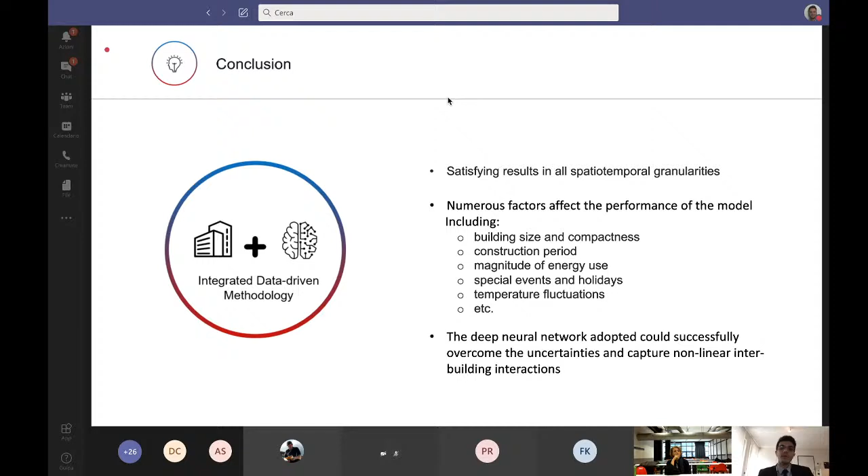We found that many factors affect the performance of the model, including building size, magnitude of the energy use, and special events. We also found that the deep neural network adopted could successfully overcome the uncertainties and capture the nonlinear interactions among the buildings.

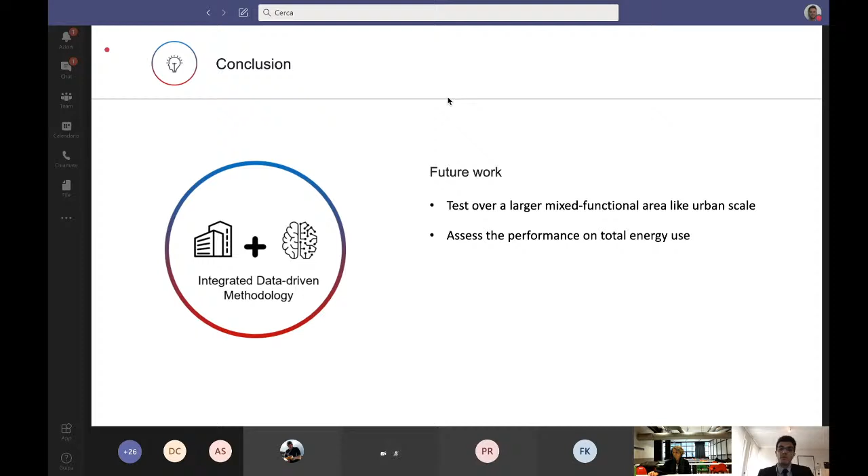Future work can be done on testing over a larger mixed functional area like an urban scale, assessing the performance on other energy carriers like gas and chilled water, and employing sequence-to-sequence deep learning algorithms like long short-term memory, since we are dealing with time series data. Adding more input features in both steps may improve the model performance. Thank you for your attention.

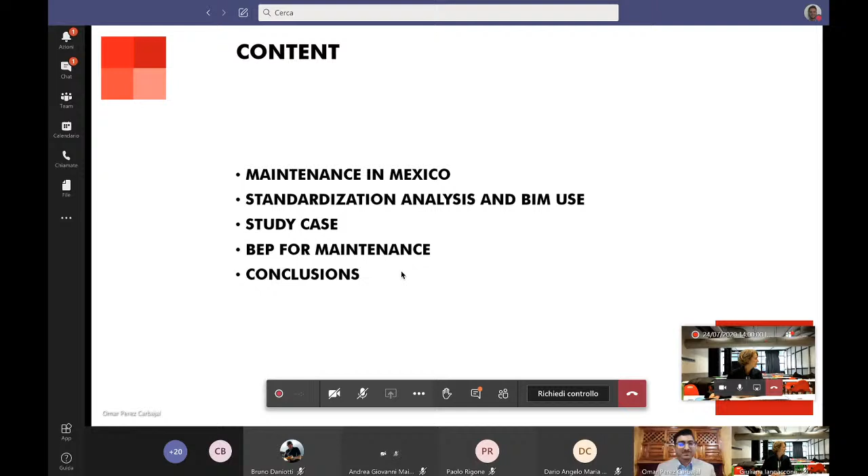In order to understand the challenges that constructions will face in the maintenance process, it is important to understand how construction in Mexico is held.

Then, all these constructive materials are highly affected by the climate influence.

These factors, in addition to a poor maintenance culture in Mexico, result in a very quick decay process and maintenance processes that are very costly, because currently maintenance activities are done when the constructive materials are totally failing.

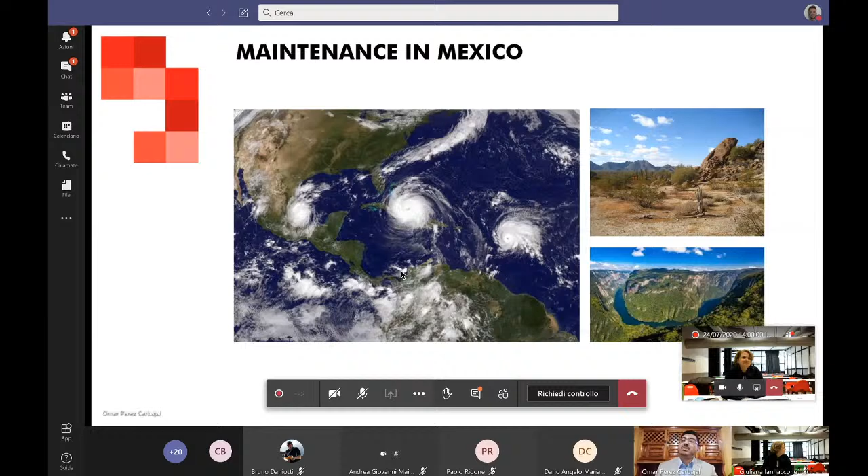How can we create a structured plan to support these maintenance activities? In order to solve this, it was decided to study the different standardizations available to define an information management strategy and the different requirements to be followed.

It was decided to divide the standardization analysis into three different levels. Firstly, studying the ISO normativity related to asset management, to the BIM execution plans supported by building information models, and the life cycle analysis and prediction.

In the second level, we studied the national normativity of a success case like the United Kingdom, where these BIM execution plans are a reality and a legal requirement.

And thirdly, we will discuss the national normativity most recently released in 2017 in Mexico, related to the BIM execution plans and its requirements.

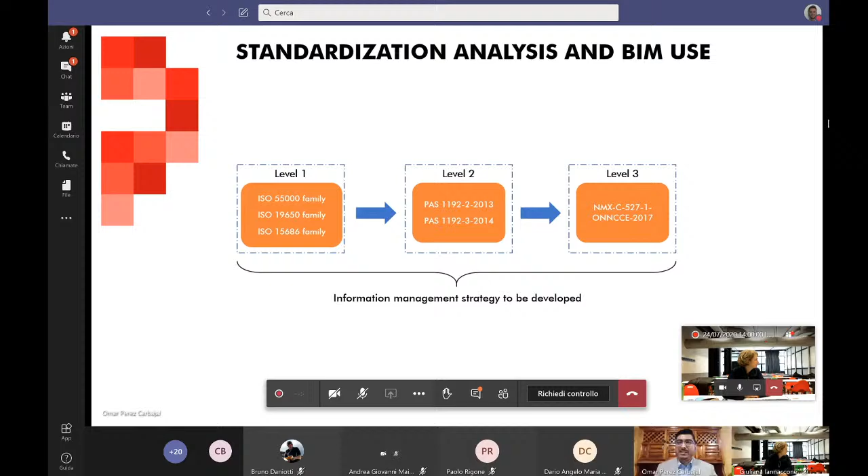One of the most important things during these processes are the trigger events. These events are where the information is generated. In the operative phase we are interested in, the trigger events will be related to the maintenance process that this building will have during its entire life cycle.

So in every maintenance process, information will be generated and recorded in the Asset Information Model, or AIM.

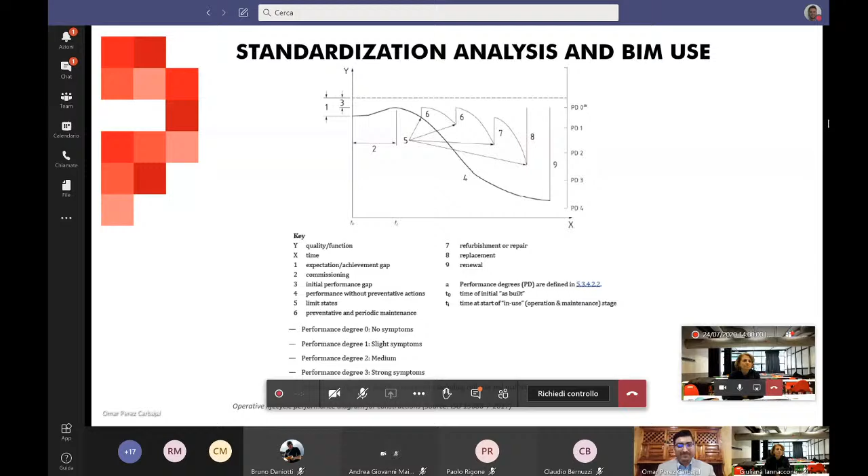Then, how can a building information model improve this structured maintenance process? Here we have some benefits.

First of all, it enhances collaborative working between specialties. This means that all the interested parties and specialties involved in the project can have the information at the right time and in an organized way, so everyone can work independently while sharing information.

Secondly, it allows efficient information processing, as the building information model, inside its structure, allows the user to input all the information in volumetric containers that we see in the model. So all the processes can be input in an easy way.

Thirdly, it links all the information stages in one source. This is an important requirement for the asset information model, as according to the standardization available, to comply with this maintenance process, it is really needed that we have a centralized source of information related to this model.

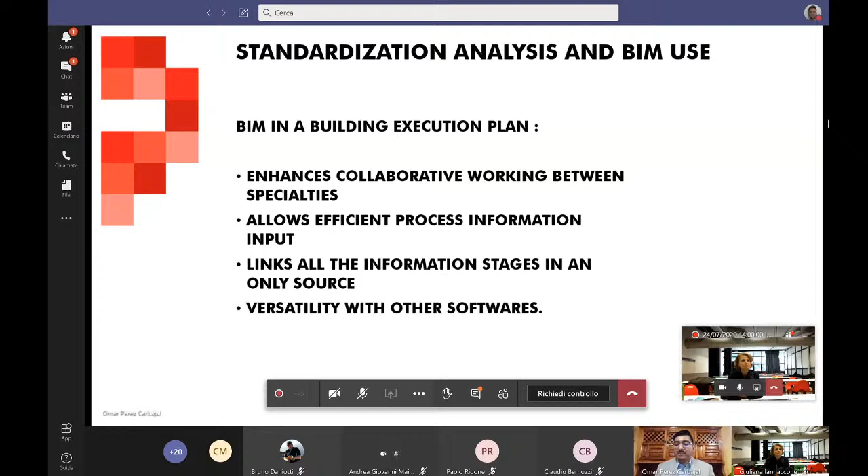And finally, coming back to collaborative working, the versatility with other software. This means that the building information model can be shared with different software according to the different specialties, in the form of an IFC.

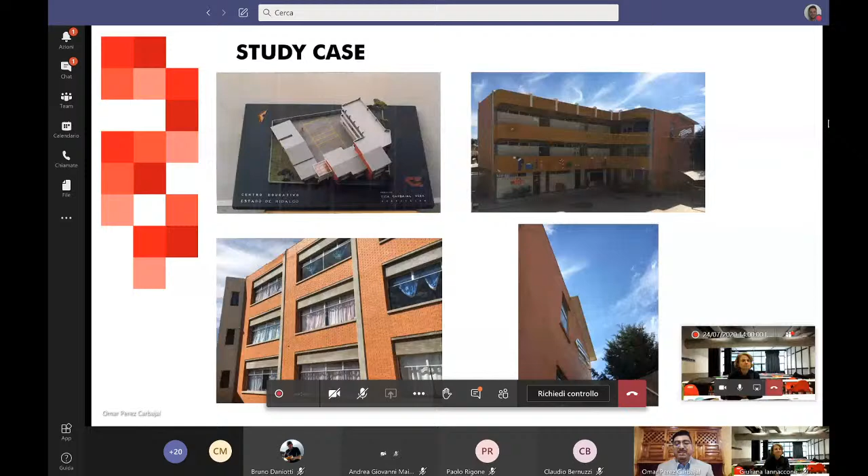Then we will pass directly to the study case. It is a medium-sized elementary school located in the central part of the country, in a municipality called Santiago Tulantepec. This small school has an approximate surface of 750 square meters, divided into 3 different levels.

Thanks to the information provided by the building owner and the architect in charge, this building information model was created. In the first step, it was decided to understand how the different sectors of the school are divided, in the form of plans, as we can see in the images.

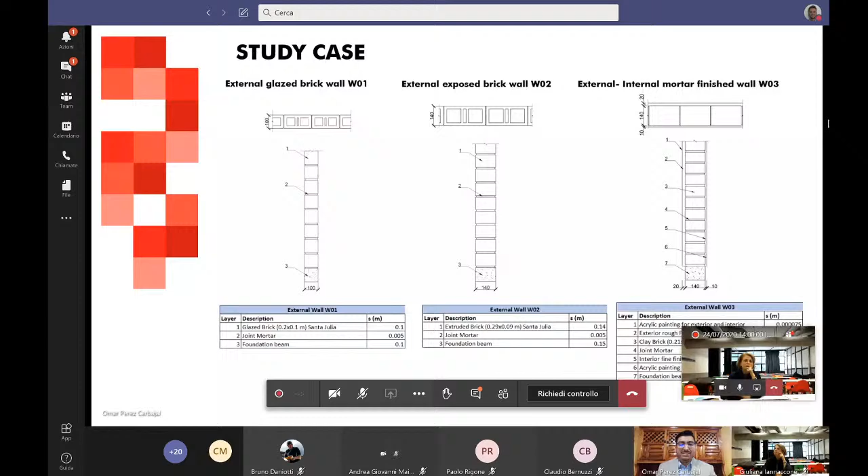There were studied the different stratigraphies or constructive solutions that the school has. Here we can see these vertical closures or walls, 5 in total, and 3 different horizontal closures or roofs. Also, inside the model, it is very easy to identify these different stratigraphies inside the plans.

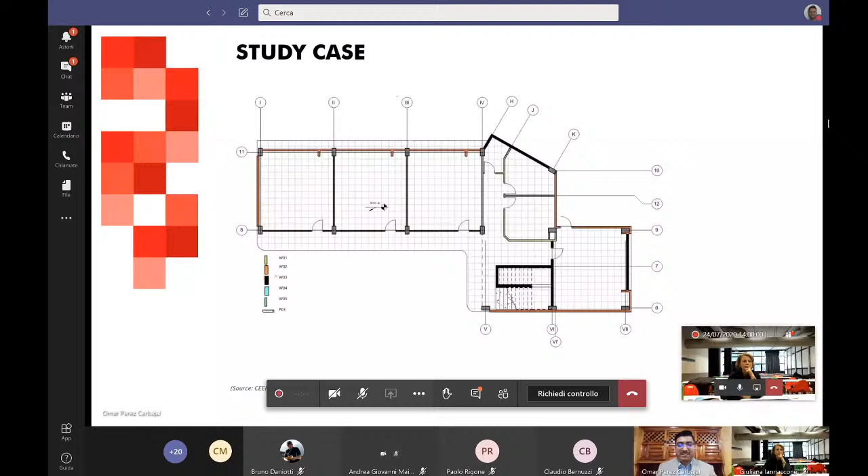So it is very easy to understand and easy to quantify inside the Revit model, as we can see here in the plans.

Then, in the very first part of the year 2020, a preliminary inspection was done in order to know the current state of the construction. We can say that after 25 years of operative life, the school has not suffered so much damage at this moment. But it was important to show some important failures that need immediate attention.

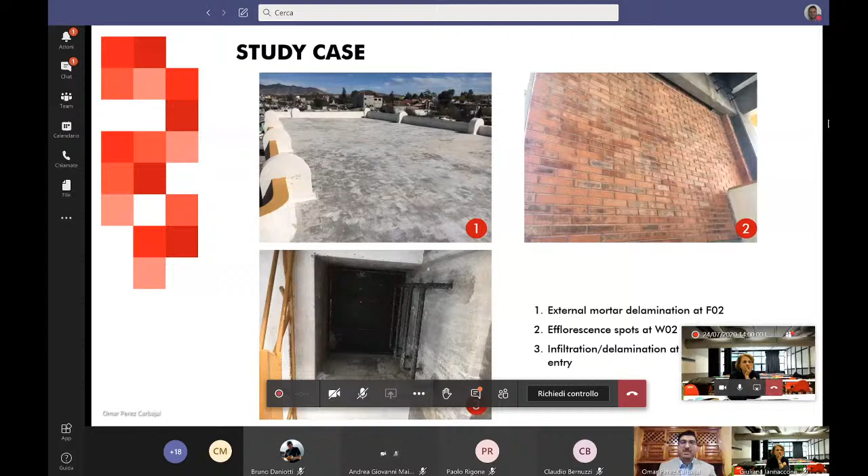Well, once we know the local study case and the factors that will affect this, now it's important to know how the building execution plan is created.

According to the standardization available, we have 4 different information requirements that need to be complied with in order to build this building execution plan. As we can see, these are organizational, asset, project, and exchange information requirements.

This will derive into the different information models that we need. In this case, the AIM or the PIM.

Coming back to the national normativity, here we can see the main requirements according to the law, and it can be seen that from point 1 to 6, it matches approximately the information requirements we have seen in the previous graphics. So, in order to identify these requirements and compile them in a form of agreement, a unified format was generated where all this information can be input and discussed, as we can see in this slide. First, we have a very brief introduction, the project information, and the different requirements for all the interested parties.

Then, the key personnel required to follow this execution plan and the agreement signatures, so everyone can follow and refer to this document for future processes.

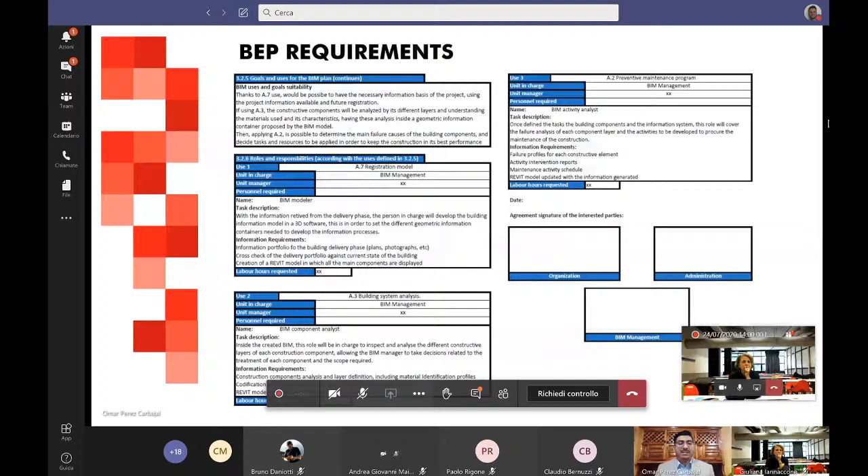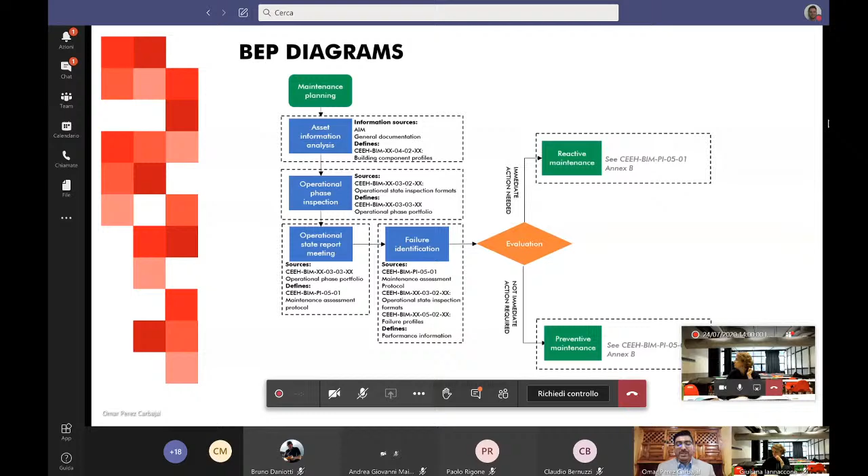Following the diagrams, we can see the different steps we follow, always complying with the document presented before, the BIM uses and goals. If it complies, the activities could be followed, executed, and approved, then passed and archived inside the AIM. Otherwise, the process needs to be repeated until it complies with the information requirements explained before.

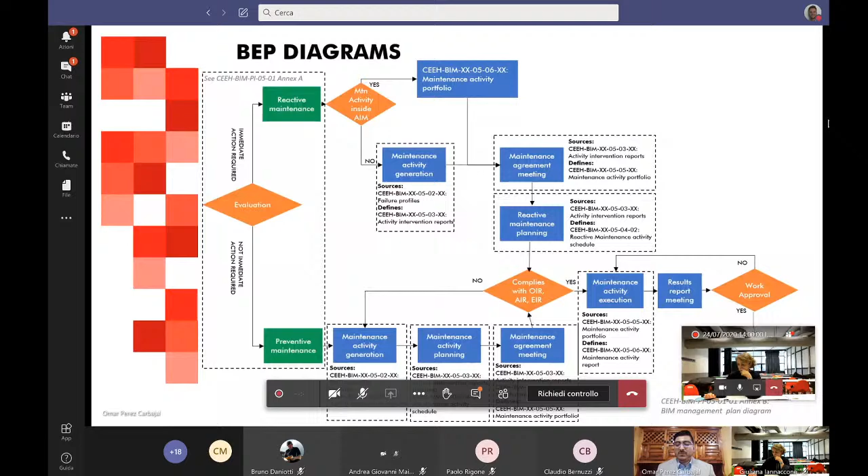Now we will explain, in a very brief way, the different documentation generated in a simple case. As can be seen in the images, we are talking about the component F02, the top group we have seen with the delamination. It explains the different constructive materials composing it, and more specifically, all the performance factors it has, thanks to the technical brochures and the information provided by the provider.

Once we identify all the elements, we can make an inspection format where all the failures can be recorded and explained in a simple way. Then, supported by this inspection process, we can speak about a failure profile with all the details about the profile and an evaluation of it.

As can be seen in the image, the performance factor here is decided to be 4, unacceptable, as the delamination of this component can compromise in a very severe way the weather tightness of the roof. Once we evaluate it, it can be presented as a suggested sequence of steps to fix this, and here we are talking about the layer replacement.

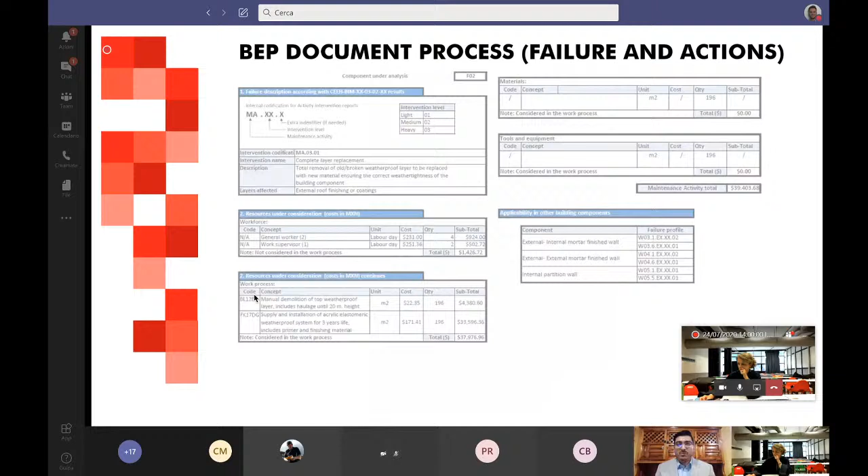Once we agree with that, we can go to an operative activity plan, as can be seen in this image. Here we can see all the resources explained in terms of workforce and tools, and the total cost that this activity will have.

Finally, we can reflect all these activities in a form of a schedule, where we can have the planned and non-planned activities. As explained before, the complete layer rehabilitation, in this case, is considered a reactive maintenance activity that must be followed with operational maintenance and results report meetings.

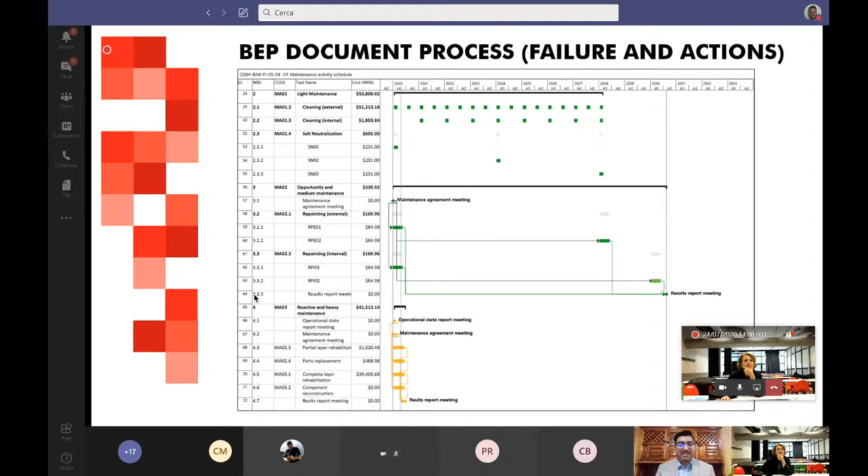Then we will explain, in a very brief way, how we can input all these information parameters inside the Revit model.

Once we are inside the Revit model, it is important to understand how Revit interprets the information we are putting in. As commented before, all the building components have 6 different constructive layers, and these constructive layers are interpreted in Revit as Revit parts, and every one of these Revit parts will have its own parameters, totally individual for each one of them.

As we can see, completing all these parameters will be very time-consuming, and mistakes can happen very easily. So it is important to have a very safe and secure way to control this. How can we input these parameters without mistakes?

For that, it is decided to rely on a tool inside the Revit model called Dynamo, which allows us to make very simple programming in order to identify these systems and apply the information parameters that we want.

Once we are in Dynamo, here we have the searching criteria in the first steps. As commented before, we are looking for parts, and at the bottom we are seeing the searching criteria we are looking for. In this case, we are looking for the building component layer, specifically W01.1.

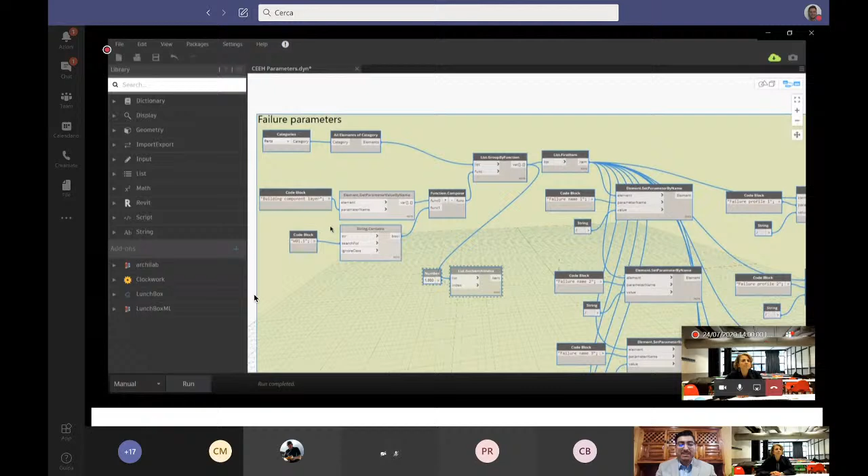Once we apply this searching criteria inside Dynamo, we can see that we find more than 200 elements. But once we search with the W01.1 criteria, we have only 44. So all these components are very easy to identify, and thanks to this very simple script, all the parameters that we need can be added.

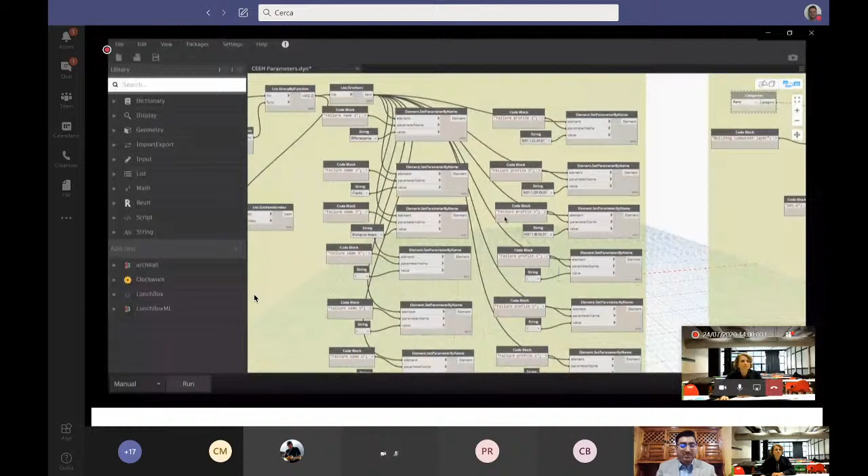Once we are inputting all the parameters and we verify that the information is correct, it is very easy to input all these parameters in just one step. That is to run the script and wait until it's done.

Once back in the model, we can randomly check the different components, and finally we see that all the information input that we have done in Dynamo is done correctly. So all the information matches and is done in a very quick way, comparing with the traditional process that is input by hand.

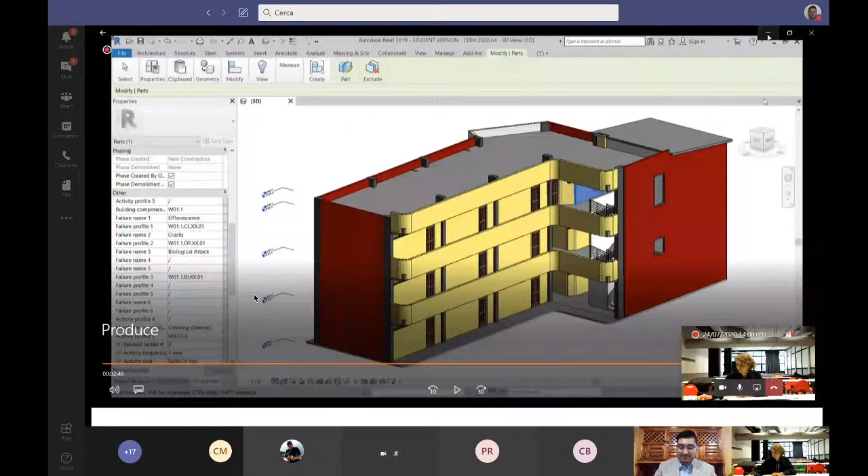Finally, we are talking about the conclusion. We can say that thanks to these BIM execution plans, there is a positive collaboration between parties, and this is a crucial step in the current building industry, because even now we need more collaboration between all the interested parties and all the specialties. So if we comply with this, the process could be much easier and much quicker.

As a drawback, it is needed an initial higher demand of time and organization, as it is required to deal with all the specialties in order to create a correct BIM execution plan.

And also, we are talking about a technological transition, because in Mexico right now the BIM technology is available, but it's not so spread. We still rely on a 2D drawing process. But if we apply these BIM execution plans and we believe in the BIM execution process, we can have benefits in the future, as happened in countries like the United States or in the European Union.

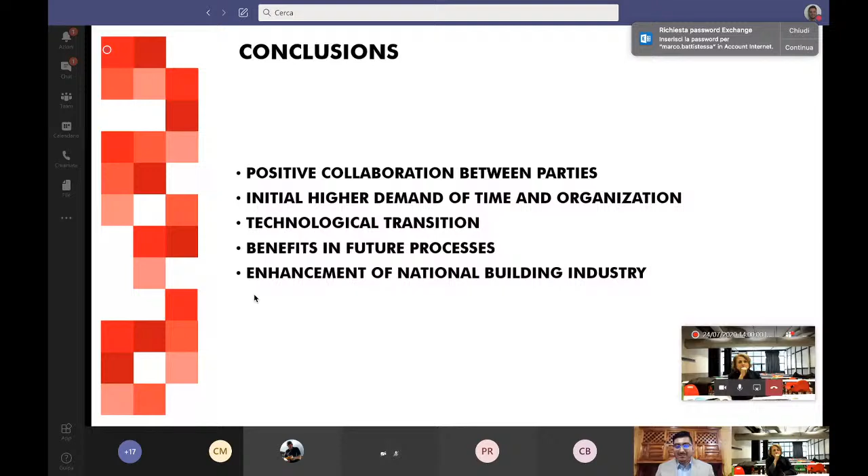And once we believe in these BIM execution plans and the BIM technology, we will improve and enhance the national building industry that is very needed in Mexico, as we have very good construction, but the standardization is still poor. So with a little bit of effort, this can become a reality.

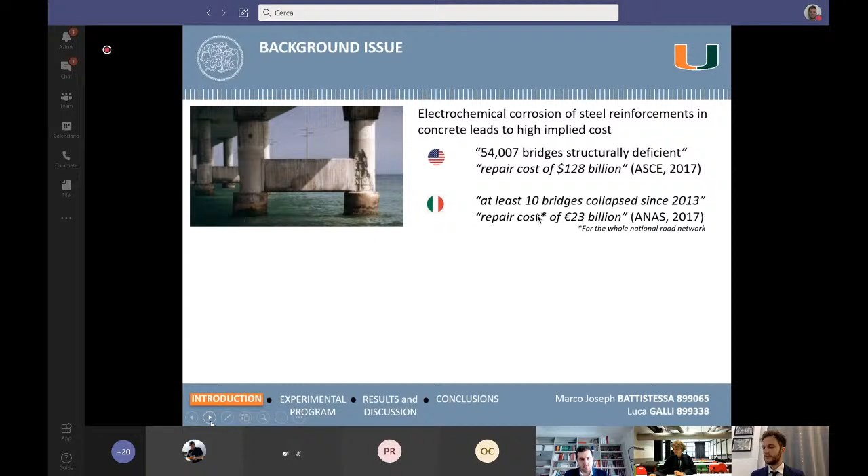To overcome this problem, alternative rebars were introduced in the last decade, made out of non-corrosive materials such as fiber-reinforced polymers, especially glass fiber-reinforced polymers, due to their competitive cost and good mechanical properties.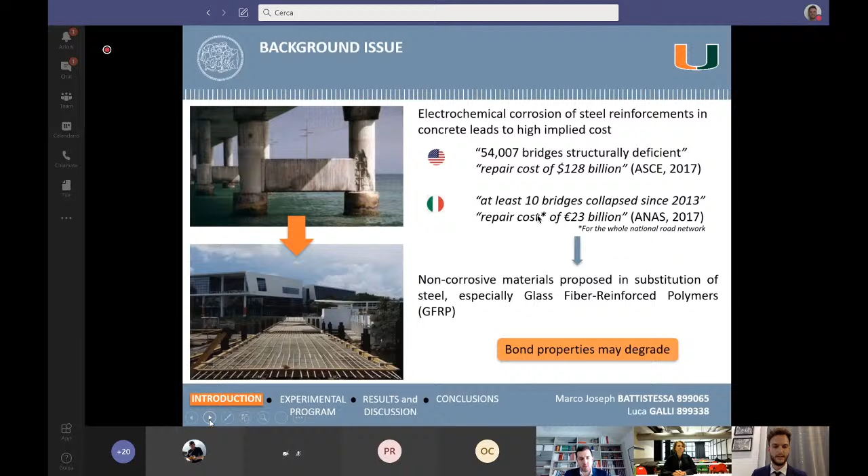However, GFRP rebars might show other issues related to their durability in concrete, because external agents like moisture content, alkalinity, and high temperature may degrade the bond of this kind of rebar. For these reasons, in-depth studies are becoming necessary to better evaluate these effects.

Nowadays, different laboratory tests are used to assess the bond strength between GFRPs and concrete. Usually specimens under accelerated exposure conditions are tested to evaluate and simulate bond and loss of performance over the long term. Among these test methods, the direct pull-out test is widely used because it's simple and requires a small specimen. Other tests like the beam test better simulate the real stress state condition of a reinforced concrete structure.

However, these tests do not apply to specimens taken from existing structures. On the other hand, as an on-field test, scanning electron microscopy is the only way to observe the aging effect of GFRP rebars on specimens that come from a real structure. But of course, this test cannot measure bond strength.

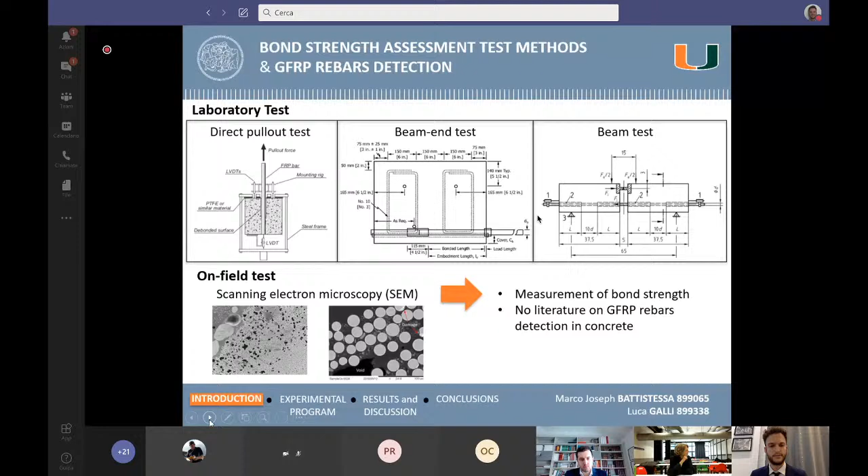So regarding on-field tests, there is a need for a way to measure the bond strength, and also there is no literature on how to detect this kind of reinforcement inside the concrete.

For this reason, this master thesis work aims to define a possible test able to evaluate changes of the adhesion between GFRPs and concrete, defined so that it may also be performed on specimens taken from existing structures. Secondly, we want to provide guidelines for the definition of a non-destructive test for the detection of this kind of reinforcement.

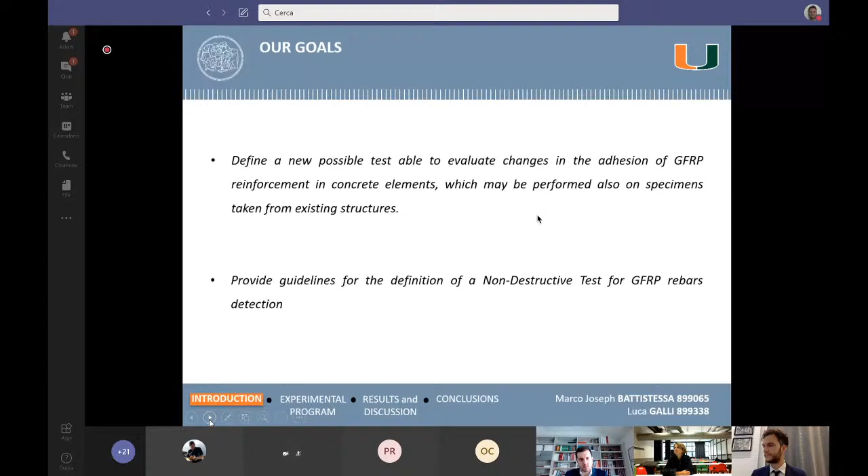During our experimental program, we chose the materials according to a previous thesis work where the new test had been introduced, in order to make comparison with them. All specimens were made out of the same kind of concrete, whose binder is composed of Portland cement and slag, and the same kind of commercially available reinforcement, covered by a sand coating and a helical wrap on the surface. In this way, we wanted to limit as much as possible the variables to be studied.

First we performed several compressive strength tests in order to have a mechanical characterization of the concrete. We carried out tests after 7, 14, and 28 days of curing in a moisture room at 23 degrees and a relative humidity of 95%.

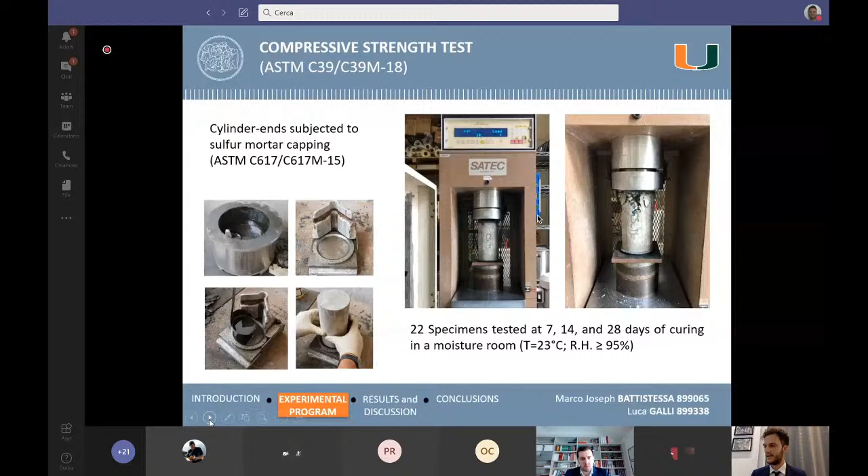Let's talk about the punch test, which is the methodology proposed in the previous thesis work to evaluate the effect of different environments on the adhesion between the GFRP and the concrete. This test is originally available in the American standard, but is used to test structural chemical anchors. Starting on this basis, it has been modified, trying to define a proper setup for the new purpose.

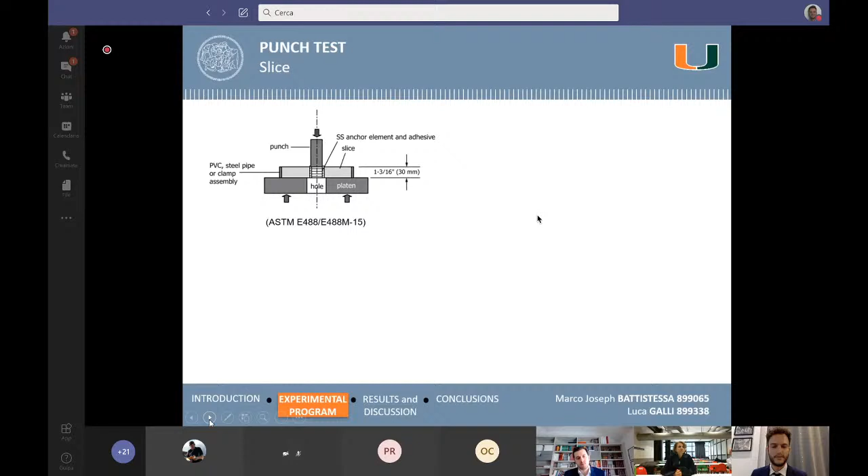The specimens, as you can see in the picture, are cylindrical slices, 3 cm thick and 15 cm in diameter. Compared to the tests previously seen, the punch test provides several advantages because, as you can see in the figure, the specimens are much smaller than those of the pull-out test.

In addition, thanks to its test methodology, it's the only method that can be applied to specimens taken from existing structures.

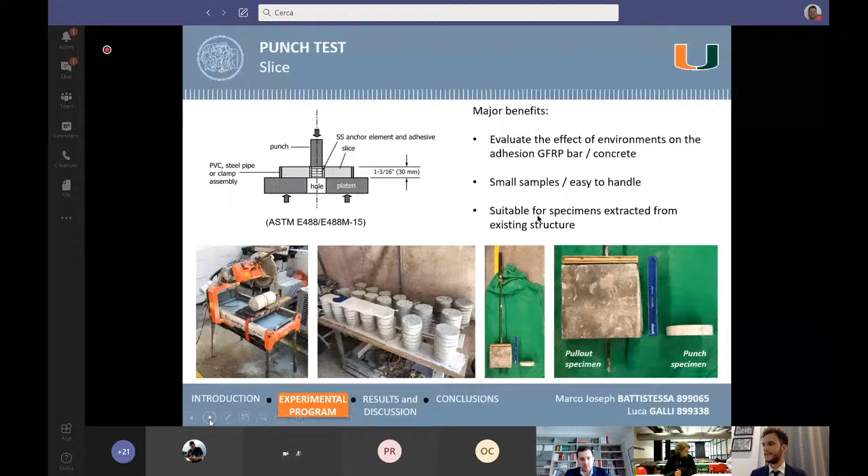However, specimens of such geometries might be affected by splitting of the concrete while the load is being applied. To avoid that, we studied the effect of confinement forces by applying a T-bolt steel clamp along the circumference of the slices in a range from 0 to 14 Nm, and also the specimen support configurations, where differences were about the interlayer between the specimen and the steel plate.

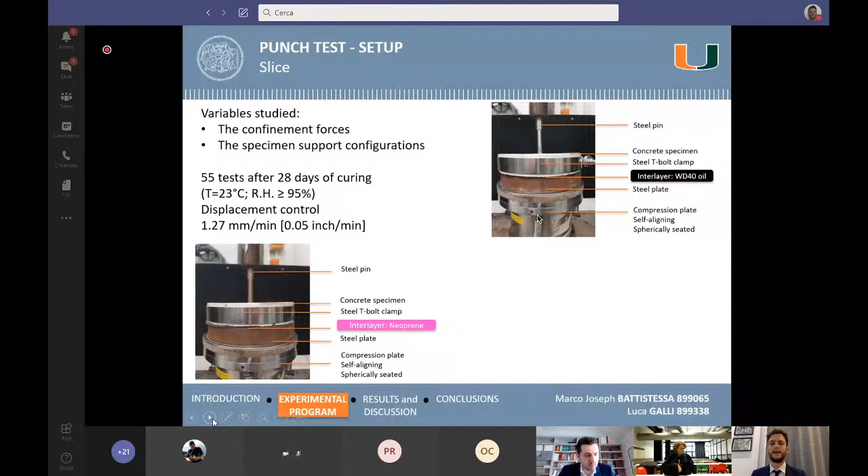In the first configuration, we used an interlayer of WD-40 oil to reduce the friction coefficient between the concrete and the steel plate. Then we tried a neoprene mat, 1.5 mm thick, and also a third configuration where we applied a sulfur mortar capping on the bottom surface of the concrete. In these last two configurations, there is a hole in the middle of the interlayer to allow the rebar displacement.

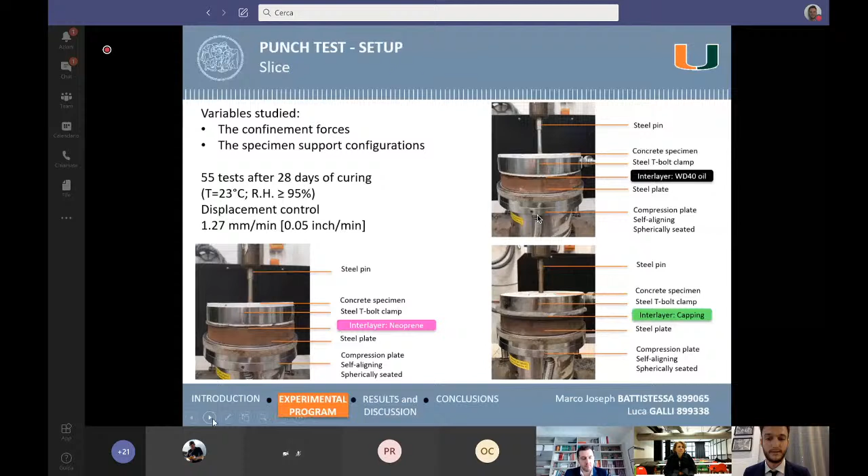Well, now let's have a look at what we got in terms of results. Here we can observe the results obtained by the compressive strength test performed at 7, 14 and 28 days of curing, and also the estimated evolution fitted according to Eurocode 2.

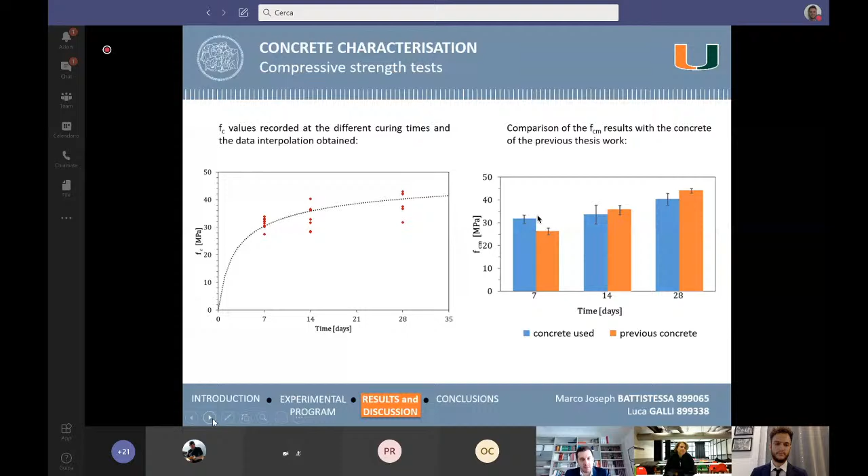This graph shows the mean compressive strength of each curing period, compared to the one obtained in the previous thesis work. You can see that after a quicker development of mechanical properties in the concrete we used, we got very similar results at 14 and in particular 28 days of curing, with values around 40 megapascal. From this point of view, it appears evident that the two concretes are comparable.

This bond stress versus slip diagram points out the three typical results observed during all the punch tests performed. No matter the support configuration used, similar trends have been obtained depending on the occurrence or not of the splitting phenomenon in the concrete slices.

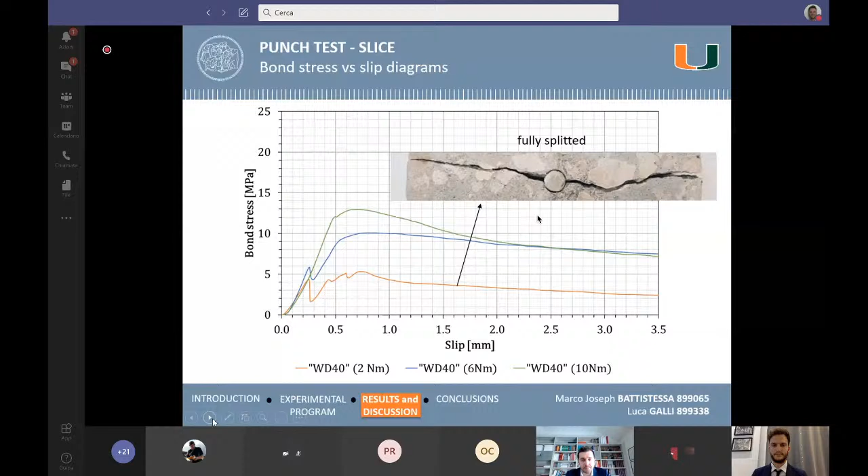The orange curve is an example of the trend obtained in all the slices recorded as fully splitted, characterized by a fully developed crack. The blue line shows specimens recorded as partially splitted, where a slight crack on the bottom surface of the slices was recorded. The green line explains the typical trend in which no evidence of concrete splitting was recorded.

In the first two cases, we can see an initial discontinuity arising in bond stress values around 4 or 5 megapascal. In this range, the average tensile strength of the concrete, estimated equal to 3.5 megapascal, might be reached. So the presence of this discontinuity seems to be related to the concrete cracking.

In the samples partially splitted, after the discontinuity there is a further increment in the bond stress. That's why in such cases the crack propagates until it meets the opposition of the confinement action provided by the steel clamp. In fact, increasing the tightening torque applied, the discontinuity becomes shorter and the maximum bond strength becomes higher.

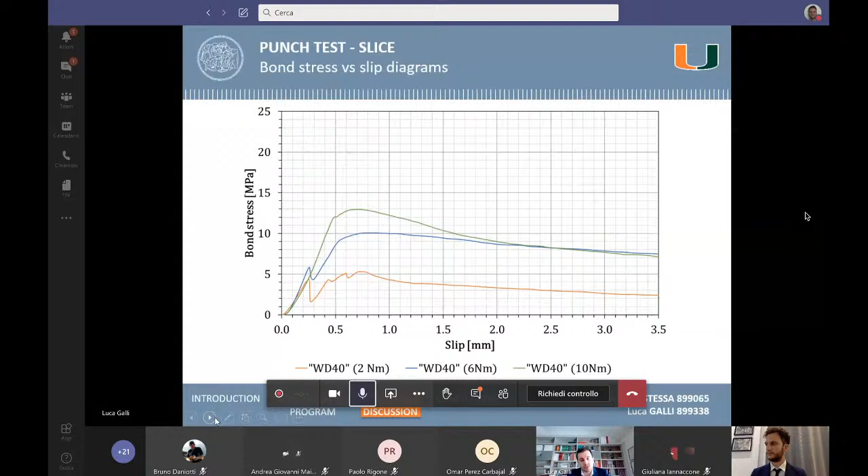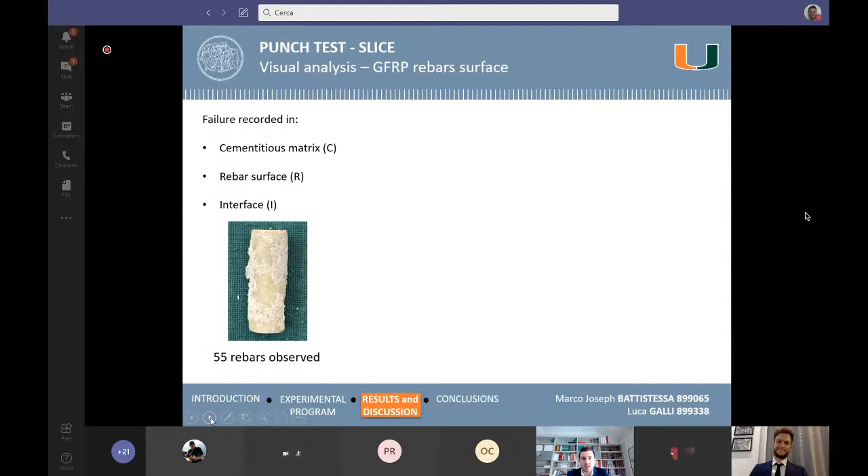At the end of the punch test, a visual analysis of the GFRP rebar surface was carried out to evaluate the failure mode. We classified the failure mode as failure at the cementitious matrix, failure at the rebar surface, and failure on the interface between concrete and reinforcement. In all the rebars observed, we have seen the three types of failure in different percentages.

Looking at this graph, we can see the maximum bond strength values obtained in all the punch tests performed, according to the different support configurations. The capping was the support configuration in which the highest number of values were recorded as not splitted.

It was experimentally determined that a tightening torque at least equal to 4 Nm should be applied to the steel clamp to guarantee this condition. A tightening torque of 10 Nm is necessary in case of WD-40, while 14 Nm has been found necessary in the neoprene configuration.

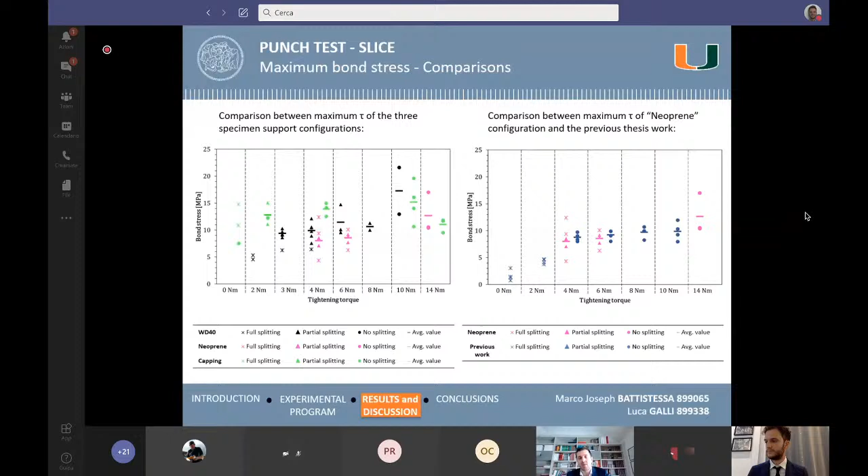It should be noticed that the specimens from the previous work, here reported as not splitted, have shown the same discontinuity in their graph that we previously analyzed. These results confirm the indication of the procedure to be used to perform the punch test.

The data that we have obtained from the concrete slices are fundamental to better evaluate also our setup for the sample extracted from real structure. For that purpose, the punch test was used also on cores extracted from reinforced concrete beams that we have cast, as shown in the picture, and subsequently on cores extracted from a real structure.

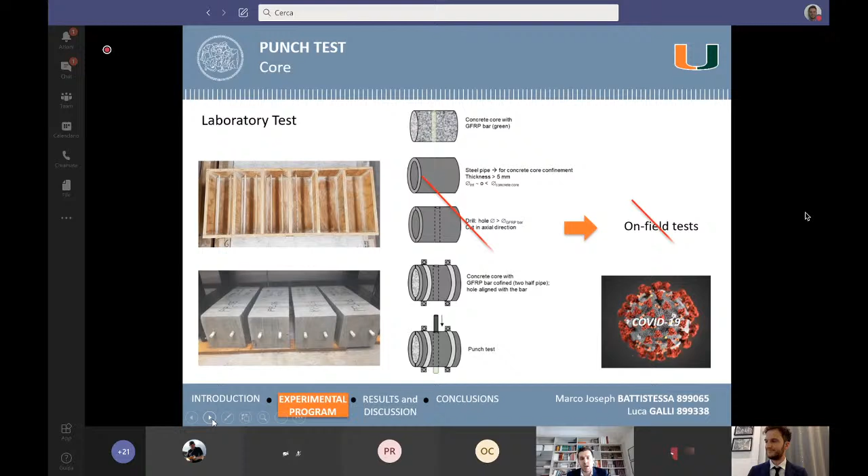Our setup was already studied, and a GFRP reinforced concrete bridge was already identified. It was planned to extract several cores from different parts of the structure to evaluate the effects of the marine environment on the adhesion between GFRP and concrete. However, while we were developing this part, the unpredictable spread of COVID-19 stopped all research activities at the University of Miami, so it was not possible to complete this part of the tests.

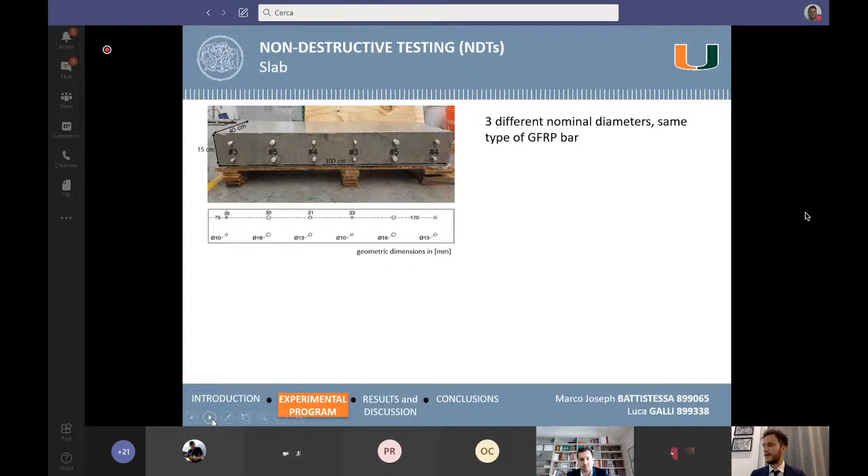In the second part of our experimental program, a reinforced concrete slab was produced to run non-destructive tests on it, and several rebars were embedded inside in order to test the instrument sensitivity. Among the available non-destructive tests, ground-penetrating radar and ultrasonic tests were selected because they seem the most promising, since they have no material dependence.

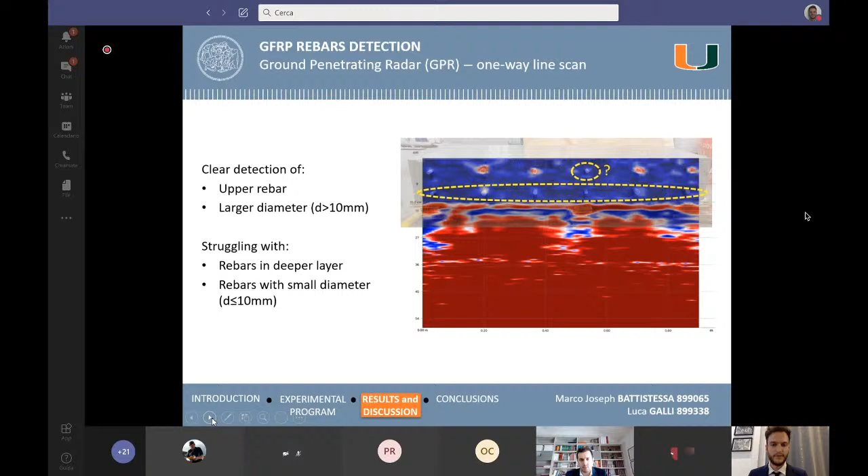Here we can see better results from the one-way line scan. As you can see, the rebars in the upper layer have been more clearly detected, which becomes clear when overlapping the picture of the slab, except for the smallest one, rebar number 3, whose nominal diameter is 10 millimeters, which was not detected. The same applies to the rebars in the bottom layer, except for rebar number 5, whose nominal diameter is 16 millimeters.

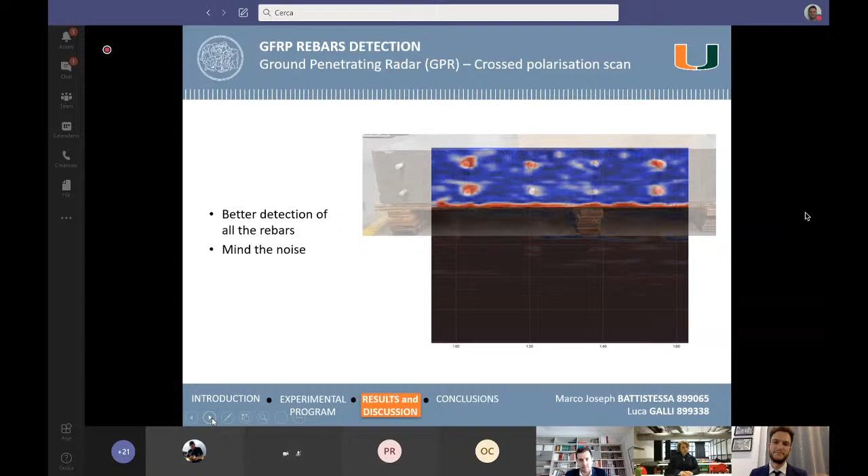We then performed a cross-polarization scan. Again, overlapping the picture of the slab, we can see that generally all the rebars have been clearly detected, so it was possible to obtain higher resolution results. But higher resolution also means more anomalies in the medium might be detected, so when balancing the settings, one must be careful about the noise.

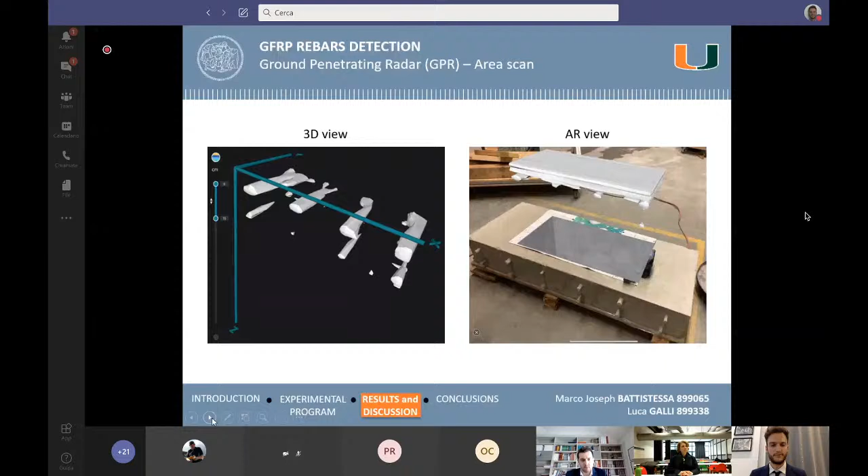We then performed an area scan, which should be performed using the special paper given by the GPR manufacturer. The area scan can be analyzed in augmented reality view and also in 3D view. This visualization gives a broad understanding of the spatial distribution of all the targets inside the concrete. But considering our purpose, we believe more useful information can be acquired from the previous two scans, since you can obtain the target position as well as depth and distances.

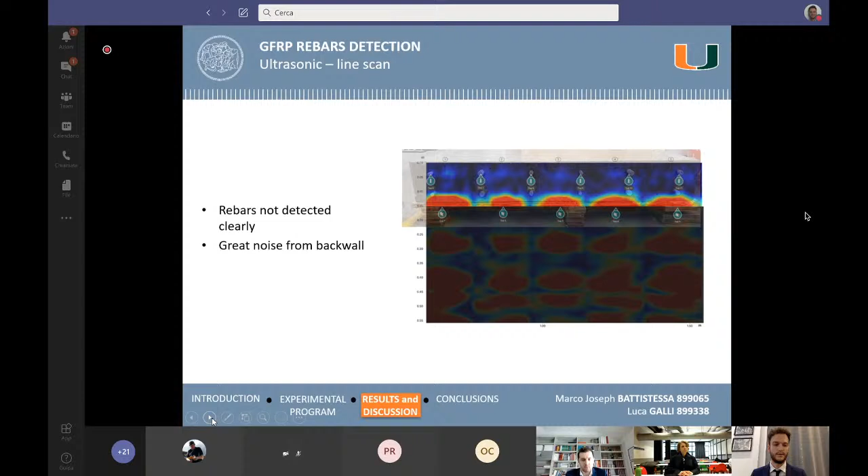At the end of our experimental program, we performed a line scan with the ultrasonic test. Again overlapping the picture of the slab, we generally cannot really tell where the rebars are. The tags shown were manually placed, but there is no clear detection of all the reinforcement, and there is also great noise from the backwall. This preliminary test shows that the ultrasonic test seems to be ineffective for locating this kind of reinforcement. Nevertheless, further tests with different types of concrete and on-field applications are essential to evaluate the real effectiveness of the ultrasonic test.

Okay, from the test carried out on this thesis work, we can draw the following conclusions. We have combined different combinations of confinement forces and specimen support configurations to define a proper setup for the punch test and to avoid concrete splitting of the sample.

A loss of adhesion has been measured in the partially and fully split specimens. We have also observed that the occurrence of concrete cracking depends on the flatness of the specimen and on the confinement force. For capping, which allows perfectly planar surfaces of the slices, a lower tightening torque has been found necessary to avoid concrete splitting, while higher values are needed for WD-40 and neoprene configurations.

Also, capping is a procedure largely used in the compressive strength test, so it might be used for the same purpose in the punch test, since it does not require the time-consuming practice of specimen preparation. In the visual analysis, it has been observed that failure at the rebar surface is higher when the bond stress is higher. But the most predominant failure mode has always been observed at the cementitious matrix level.

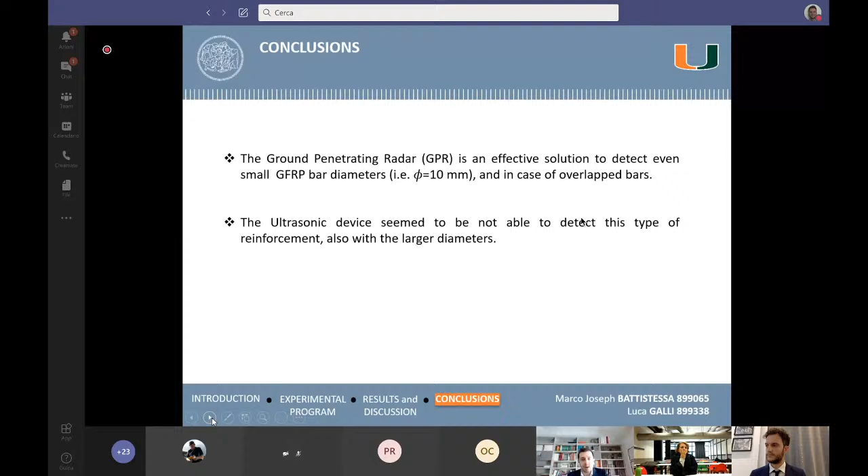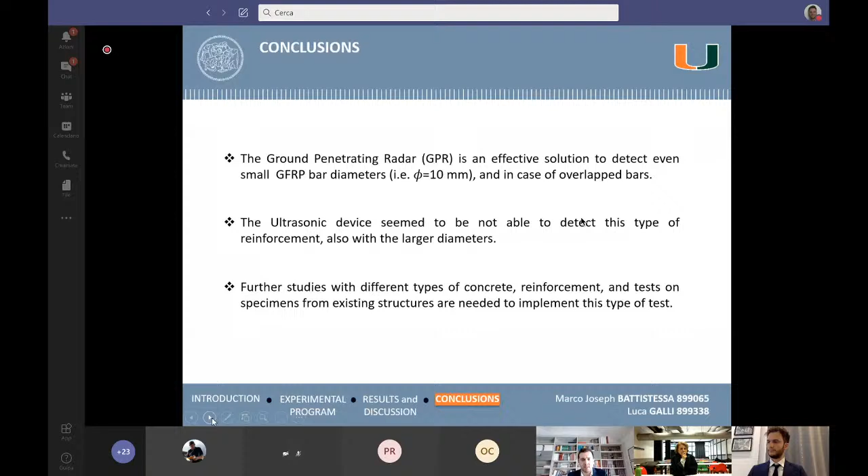The results compared with previous thesis work have confirmed the reliability of the proposed methodology for the punch test. Ground penetrating radar proved to be an effective solution to detect even small GFRP diameters, including in cases of overlapped bars. The ultrasonic device, instead, seemed unable to detect this type of reinforcement, even with larger diameters. Further studies with different types of concrete reinforcement and tests on specimens from existing structures are needed to implement this type of test. Thank you so much for your attention.

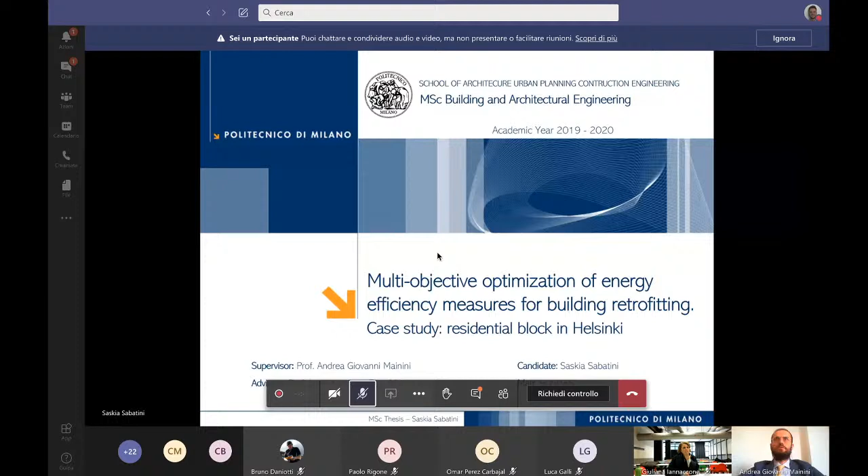The thesis addresses the issue of cost optimality in the choice of optimal solutions in terms of investment and energy saving for the renovation of a case study building located in Helsinki. The study involved the use of IDA ICE software and its multi-objective optimization tool for selecting suitable energy performance improvement measures. In addition, the candidate worked closely with the software development team, and part of the work consisted of undertaking software debugging activities. So good luck for your presentation and have a nice start.

Thank you for the introduction, Professor. So this thesis concerns multi-objective optimization for measures for a case study located in Helsinki. The main objectives are to define efficiency measures to maximize both the cost effectiveness and the energy performance of the building retrofitting, in compliance with national requirements. Then the evaluation of the solution in terms of economic viability and primary energy consumption. And finally, the evaluation of the selected final solution in terms of national nearly zero energy requirements.

So I wanted first to introduce you briefly with some selected data on the context. This chart shows the energy consumption share in residential buildings, updated to November 2018, taken from official statistics data. As you can see, the highest energy consumption is represented by space heating, which counts for 68%. Thanks to the 294.2 million square meters of residential buildings throughout the country, it is possible to calculate for the same year, 2018, the average primary energy consumption, which counts for 224.3 kilowatt-hours per square meter per year.

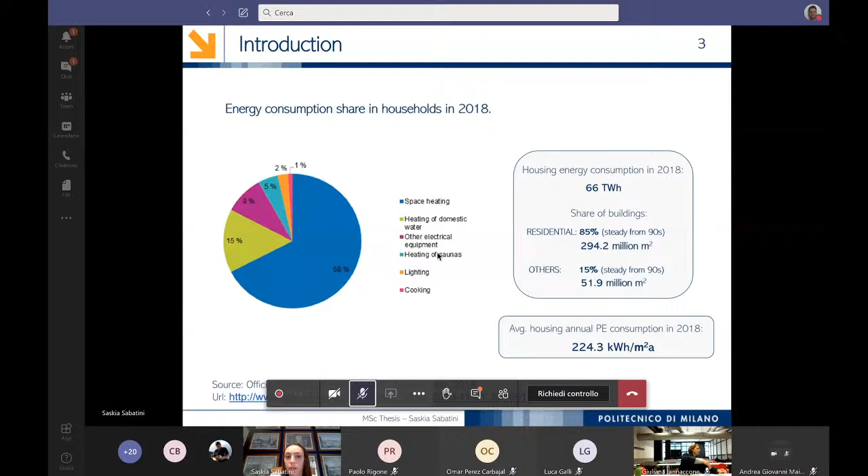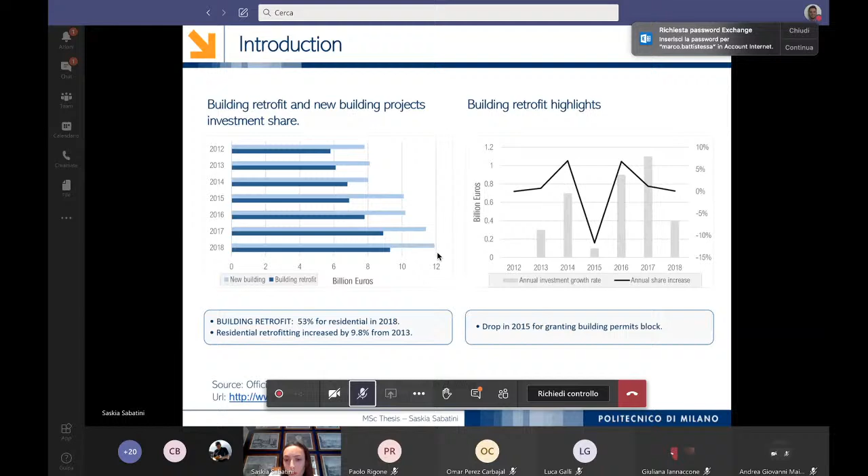Looking at some more economic data, in this chart you can see the investment share divided between building retrofit and new building projects. As you can see from the dark blue bar, the building retrofit share is every year more than 40%, and these data are taken from 2012. On the right graph, you can see some highlights I selected mainly for building retrofitting: the annual investment growth rate, shown as the gray bar. You can see it increased every year, except for two years, 2018 and 2015, in which a big drop occurred even in the annual share increase. According to statistics, this was caused by a national block of granted building permits.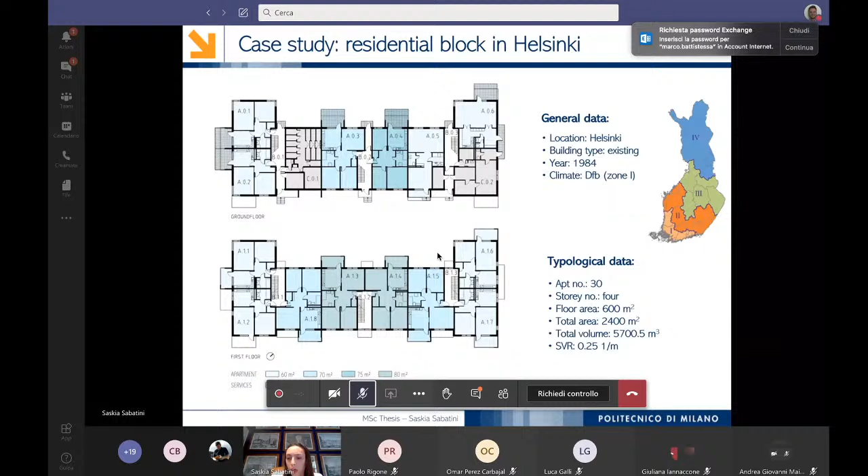We have a total area of 2,400 square meters and a surface to volume ratio of 0.25. From these perspective views, you can see the most typical feature of the building, which are these semi-closed balconies, which in the energy model act as external fixed shading.

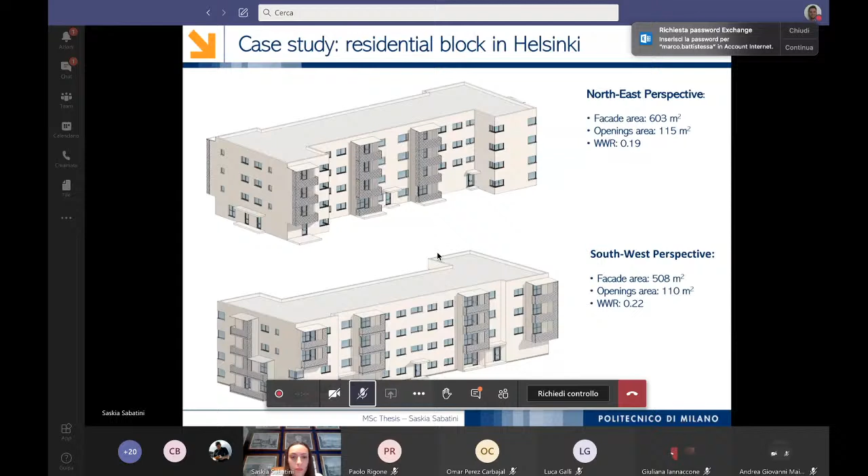Regarding the internal gains, we have standard average gains for all of them except for the occupancy, which counts for 28 square meters per person, which is actually a standard occupancy rate for this type of building category in Finland, which is a block of flats.

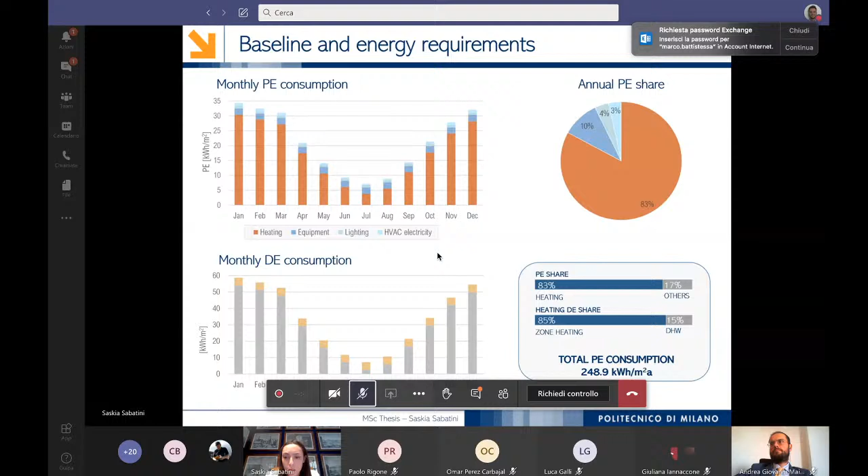Looking at the baselines, the baseline is the current state of the building. It accounts for a total primary energy consumption of 248.9 kilowatt hours per square meter per year. Looking at this data in terms of primary energy share, it's possible to see it accounts for 83%. This 83% is for heating, and looking at this data in terms of energy share, it counts for 85% with zone heating, against only 15% with domestic hot water.

The energy requirements that constitute the target of this work were two. The first one is building retrofitting requirements. These are regulated by the National Building Code of Finland. It is a percentage, according to the building category, that should be reduced from the E value calculated of the building. For this case, which is a block of flats, the percentage was 15%, meaning that the minimum target primary energy consumption accounts for 211.5 kilowatt hours per square meter per year.

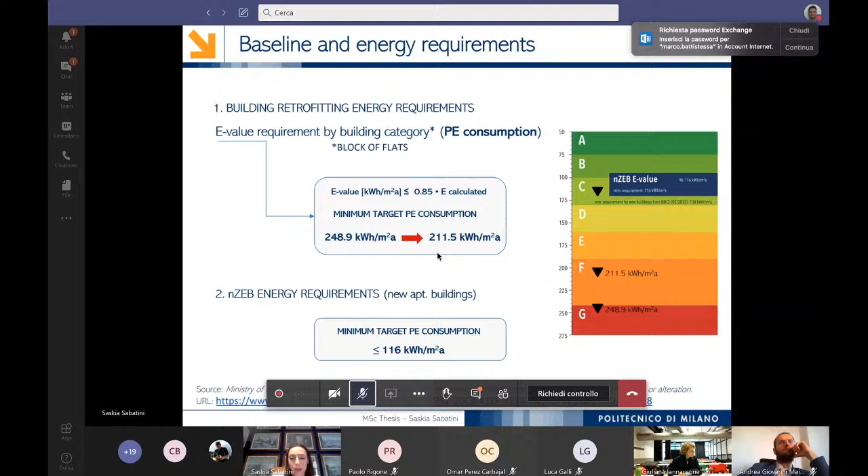On the other hand, we have the nearly zero energy building energy requirements. These are set for new apartment buildings. At this moment, this is also a setting that is used even nationally for existing buildings. So it counts for 116 kilowatt hours per square meter per year.

So the optimization is composed of two objective functions. These are conflicting with each other. The optimization is the minimization of both the global cost, calculated in euros per square meter, and the primary energy consumption. The global cost is calculated via the net present value, a financial method, on a calculation period of 30 years, while the primary energy consumption is directly the outcome from the IDA dynamic energy simulation software.

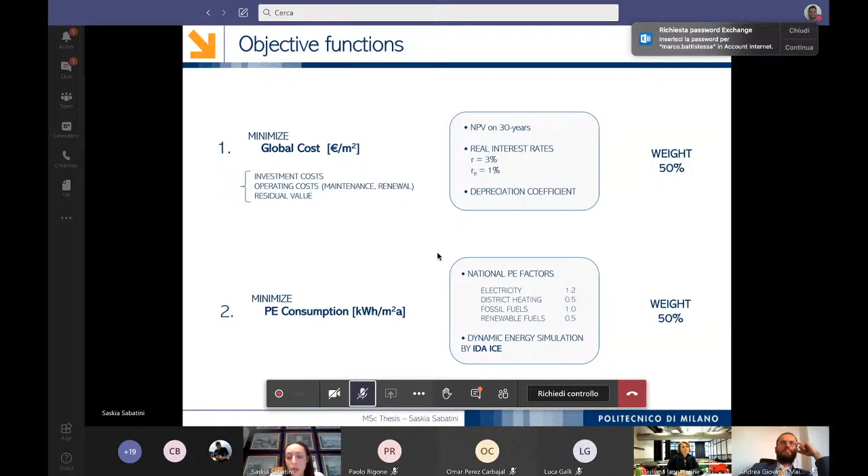Note that by choice, both functions were equally weighted. This means that the approach at the end for the final solution was a posteriori, so the solution lies on the front.

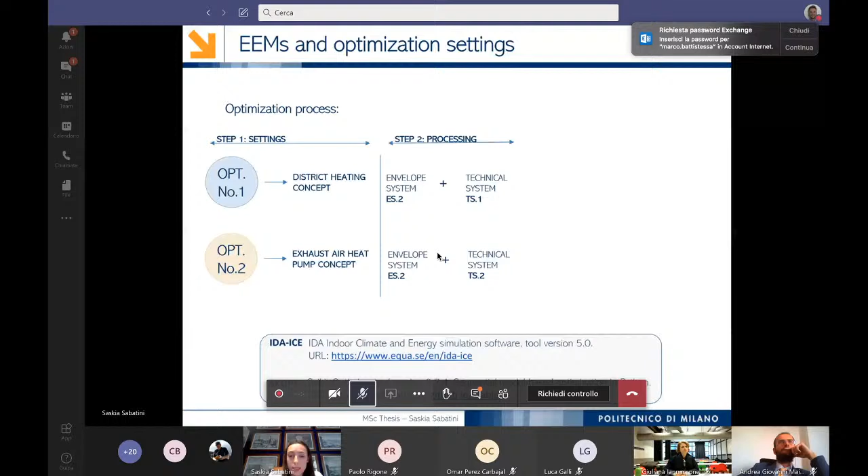The second step is the processing. This is the most time consuming. It is the iteration of the packages selected. In this case, each optimization took around 3 days.

The final step is step 3. It is finally all the output from the analysis plotted. We then have 2 Pareto fronts, and through the process of decision making, the optimal solution is selected.

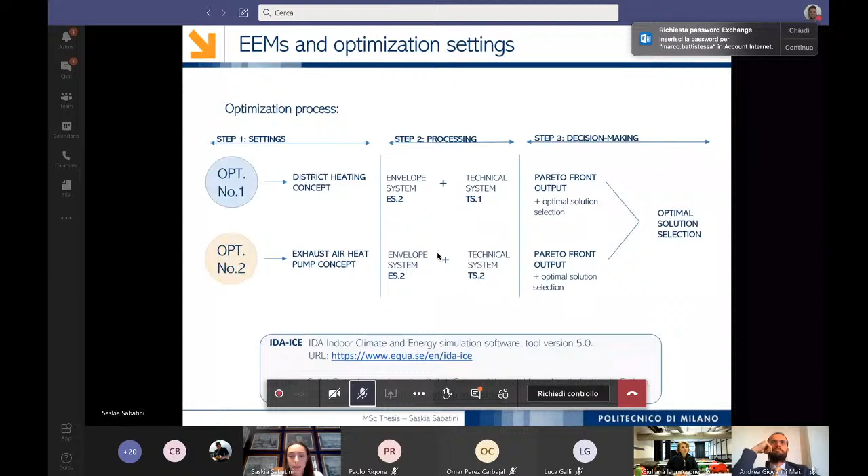However, an optimal solution was chosen for both optimizations. In the first optimization we have the best objectives because we have the best energy performance with a lower cost over a calculation period of 30 years, but it also has a higher investment cost: 94 euro per square meter against 82.8. The investment cost in this kind of project should always be calculated in a wider perspective, over 30 years, but it is still important because in a real project this is the value that determines the financial loan.

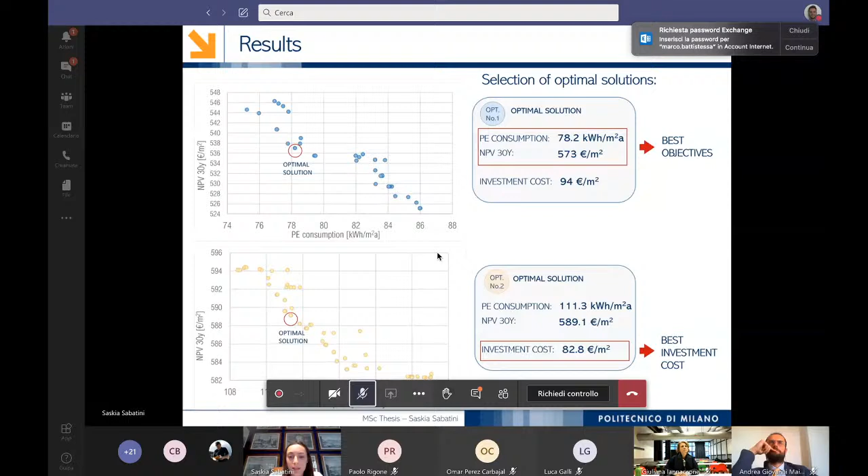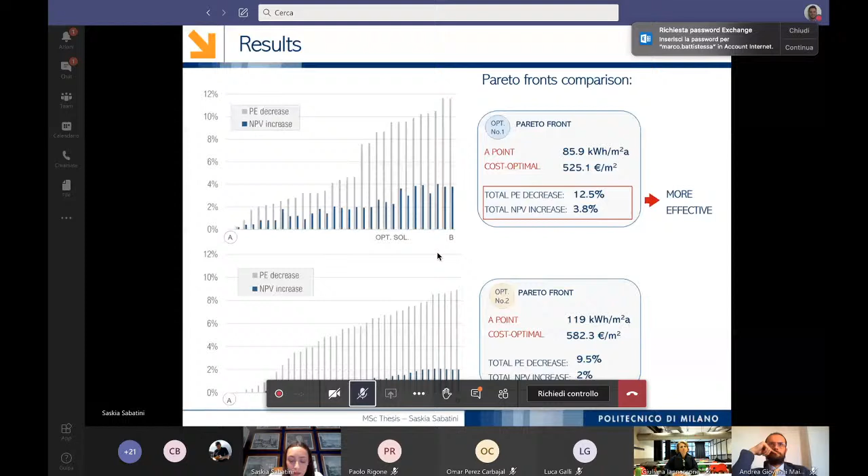Further reasoning concerned the Pareto points as a whole, to evaluate which of the two optimizations was more effective in terms of primary energy decrease and net present value increase. This means which optimization achieves the best energy performance with the lowest global cost. The results show that this optimization is the more effective one, and this is why the final solution selected belongs to this optimization.

So the district heating concept counts - you can see in red the final primary energy consumption, which is 78.2 kilowatt-hour per square meter per year. As you can see, it largely achieved both targets, the building retrofitting and the nearly zero energy building, with a global cost of 573 euro per square meter.

I wanted to conclude this presentation with some highlights of this work. It was a contribution to defining the applicable measures for building retrofitting in this very typical Finnish residential block, especially for a country like Finland, where this cost-optimality method is still not implemented in the codes. Also, the contribution was in testing this coupling between SKOPT optimizer with IDA-ICE for the first time. SKOPT optimizer was released in February 2020. On the other hand, this also allowed finding some limitations.

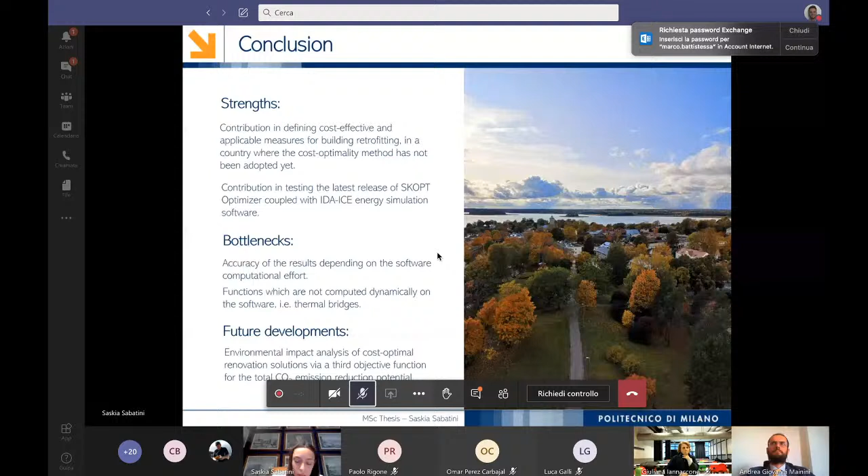Finally, as a future development, it would be interesting to include another multi-objective function regarding CO2 emission reduction potential, in order to evaluate the whole process also with an environmental impact analysis. Thank you for your attention.

Thank you, Saskia. Yes, this is the second thesis of today that we see work within international cooperation - really interesting work again. Thank you very much. I guess that we have no questions from the work.

Indeed, yeah - anyway, they're not asking questions. No, so we can move on. No questions. Thank you very much, see you later for the final session.

I don't know if we have Professor Re Cecconi - I think he is not here. We have a team of two candidates, Alex and Sofia Fentani, and the supervisor is Professor Fulvio Re Cecconi. He has another commitment, I cannot see him. Maybe yes, maybe. I don't know if you are in contact with him? We were talking that we were supposed to be here today. Yeah, he has an institutional meeting at the same time. Just in case he's able to join us, I'll give him the floor to say some words about your work. But now let's see, our time is going to start.

Okay, you can start. Good afternoon. So before starting, we would like to thank Mr. Re Cecconi, who cannot be here today, for his help and guidance, and I give the floor to Sophia. Good afternoon, and together with Alex we're going to present the thesis work of this semester about the construction of... Can you present to the...